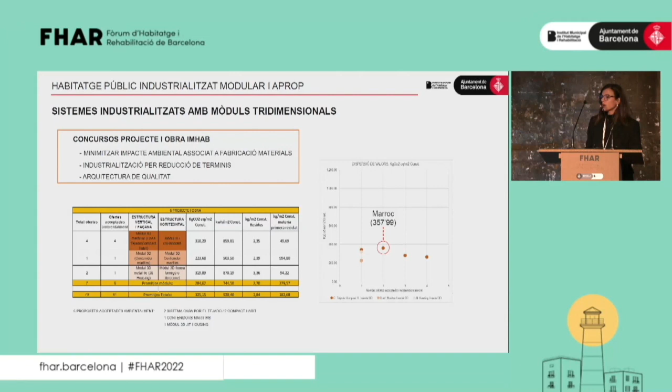We also have the dispersion diagram of three-dimensional solutions, where we have marked the position of the Marroc project that we'll be explaining with their impact value. We can see the different solutions: maritime containers in the first place, modules containing an industrial structure that was used as a structure as part of the closing.

With the different necessary adequations, and differently to others, this is an open system and a universal system, which allows us not to be linked to one only provider.

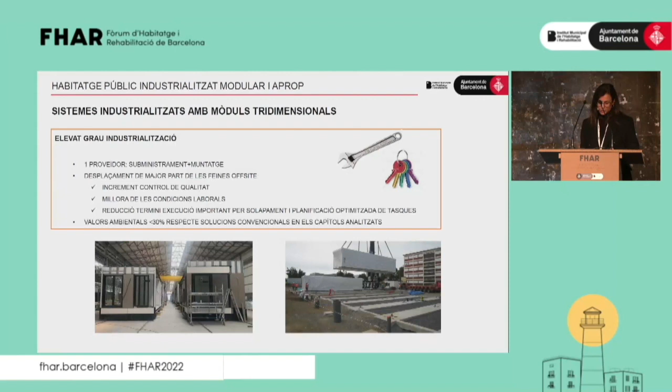However, they still mean lower values compared to conventional construction systems, traditional constructions, so to call them, at least in the chapters that have been analyzed in terms of facade and structure.

Another interesting aspect here is the integration of the agents. All of these are aspects that are cross-cutting and common to all industrialized solutions. We're not saying that some of them have them and some don't, but some solutions have them in a better way than others. We have done a 2D wooden chart and a three-dimensional solution chart.

But in reality there is no such thing as a division between the two, because, as we have seen, Isabel Perez was explaining her project with 2D wooden solutions for the construction of barracks. And there is a combination of both in different degrees of using these different systems.

Regarding collaboration, in these three-dimensional systems, the management system for project and works itself demands a close collaboration between the site workers and the building companies. But in tridimensional projects this is even more so, because the technician, the architect, will need to have the knowledge from the worker in charge of the system.

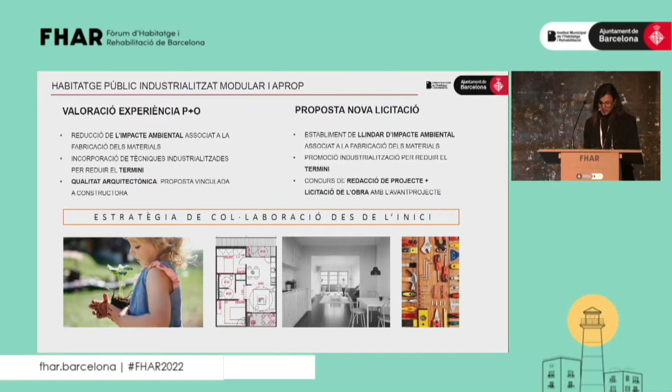And this was our presentation, and I will now give way to the projects that our writers will explain.

Marc has been working for over 30 years with 2D and 3D systems—concrete, frame, hybrid models, wood, panels. He's touched every material. He's collaborated with different companies of the sector: Pujol, Menpe, Arkinson, West. His studio is leading in applying protocols and seals such as BREEAM, Passive House, and others. He's also worked on health and architecture with WELL certifications and LEED. He has long collaborative experience in planning, planner systems, and other more complex systems with complicated acronyms that maybe he can tell us about himself.

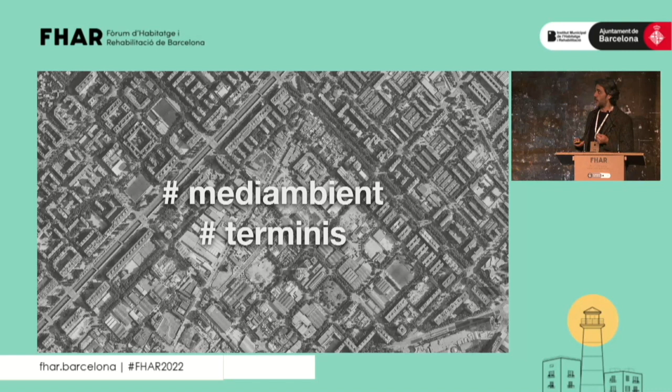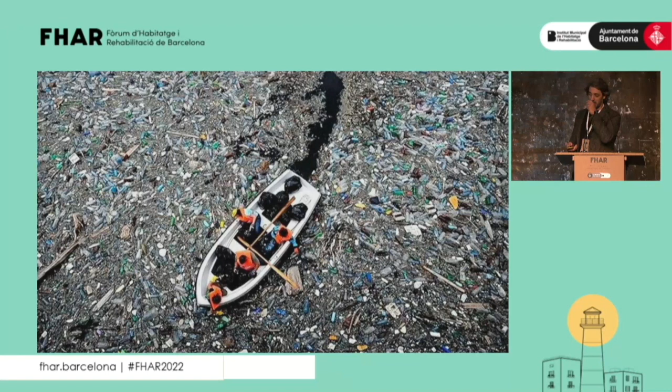This concerns environment and deadlines. These are the two main terms. Maybe for next year I would like to give a hint in the direction of environment, because I would like to show you images that are very sad, but they are real, the fruit of human activity on this planet.

We are generating these cemeteries of waste, and we are one more agent, the agent of construction, generating all this waste, all these residues. For a proposal of improvement in terms of deadlines, one of the acronyms Cecilia was mentioning is IPD.

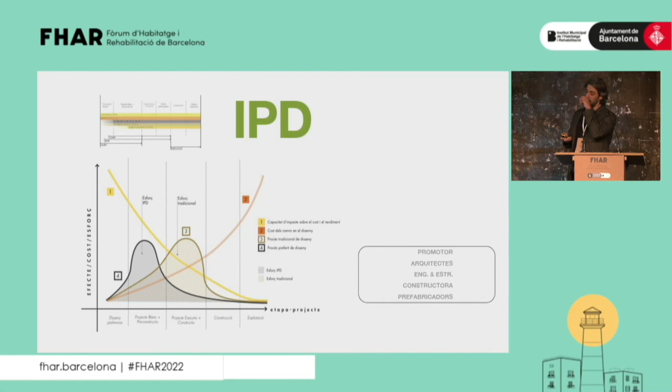This bidding is already being done, and this has been a great advance. This allows us to reduce our deadlines in a spectacular way, with collaborative work among promoters, architects, and construction specialists. Integrated Project Delivery, what IPD stands for, offers solutions to this ecosystem of people participating in the development of a project.

It's not just a construction company and some architects. There are so many departments, people, companies. All of these that we see on the screen have participated in this specific project.

We must be aware that managing over 60 people has to be done well, and this is essential. It's essential to do it in an efficient way so that projects will be more valuable and agile. In any case, these are proposals working with IPD in a collaborative way.

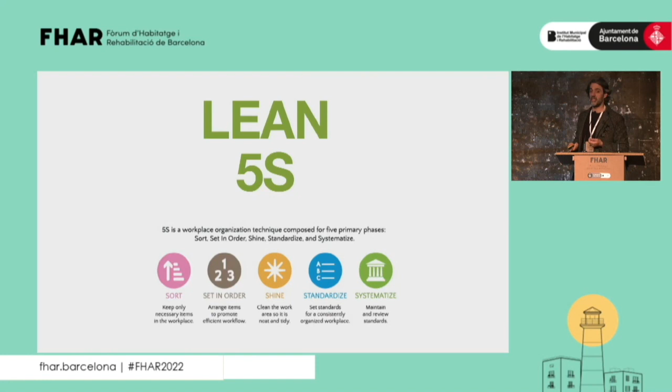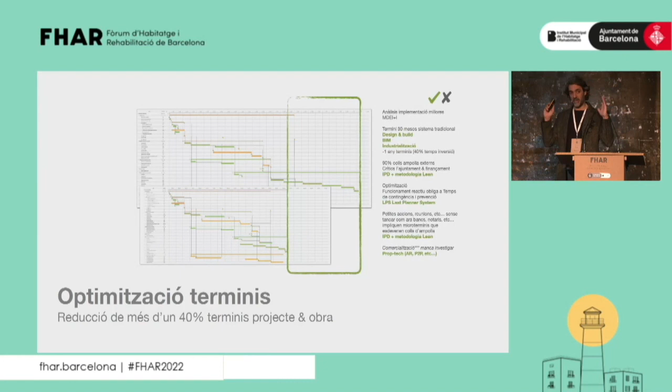Applying lean and 5S technologies, the automotive industry is one example of this. Today, we're optimizing deadlines thanks to working with these industrialized standards, achieving a reduction of over 40% in project and work deadlines.

I'm going to tell you a little bit about the project. I'm not here to talk about my book, but just a little bit. The reason why it started here, the reason why 3D, we're talking about Pere IV Street, which is near here, Rambla El Prim, in the 22@ district, where industrial activity has always been very strong.

We wanted to pay homage to this neighborhood, and we wanted to construct a building that would give us an idea of industrial activity 2.0, 3.0, 4.0, but in a newer way.

When developing the project, we realized that housing modules were being developed, thought with 2 bedrooms each. The first project was displaying a vertical communication axis and some stepping stones. But the first architectural project was leading us to very clear repetition, with different pieces.

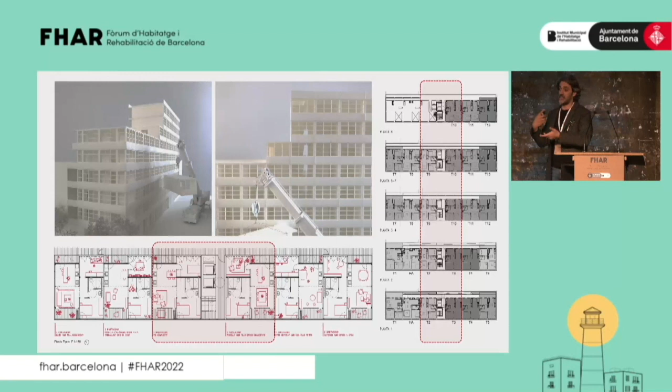The architectural proposal was asking us to bring this to the 3D experience. How will we do it? When we start with construction, the idea is to start with the central core and build upward through these 3D models and the stepping stones, which will allow phase 2 and phase 3 to be done in a more agile and dynamic way without needing auxiliary intermediates, making use of this central axis to connect to phase 2 and phase 3.

It's important to bear in mind that when working quickly like this, we enter into identical designing. But then you realize the first floor is not the same as the second floor, and we can come up to 10 different typologies, meaning prefabricated industrialized systems should also be capable of working in a tailor-made way so we can observe the different variations for each space or floor.

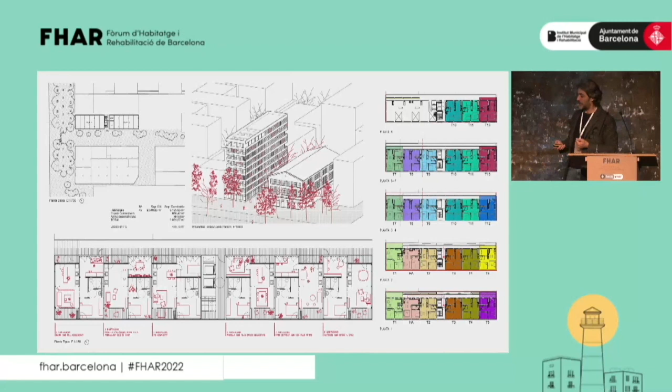Regarding the different rooms, all the floors look the same. However, the way the water nucleus has been distributed generates a triangulation, which, when juxtaposed to the gallery in the stepping stones connecting to the passage gallery, gives a broad answer in terms of how they're used, the different use typologies for families in the 21st century, ways of working from home, like home office, etc.

Prefabrication and industrialization are 2 similar concepts, but they're not the same.

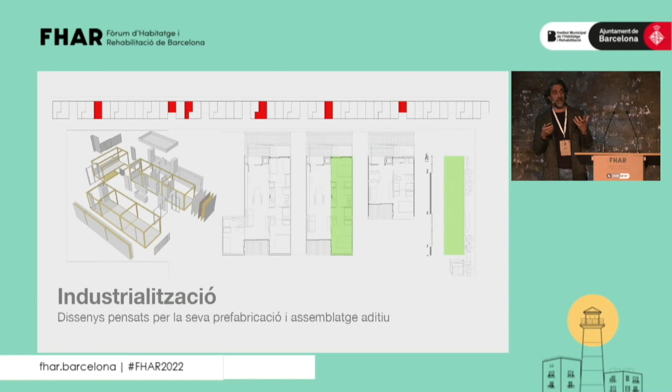When we are designing in an industrialized way, it is important to bear in mind how this will be executed, also from the design stage. We can't give an answer to typologic problems later and ask the industrialization company to give an answer to those problems. We have realized how 2D systems were not feasible and compatible with our project, for example.

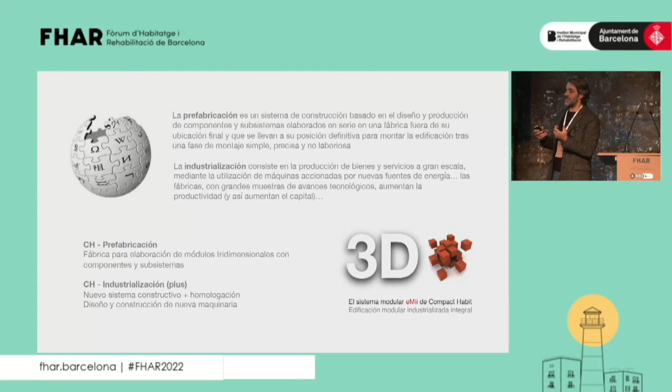It was a project thought to be carried out in a 3-dimensional way. Concerning prefabrication and industrialization, the great difference is that in prefabrication we're working outside, so the subsystems and components industry are elaborated in a controlled way, whereas in industrialization, goods and services are produced at a big scale with another technological component. Other examples being developed today work more in a prefabrication way, not so much industrialized. They are not antagonical concepts, but complementary ones.

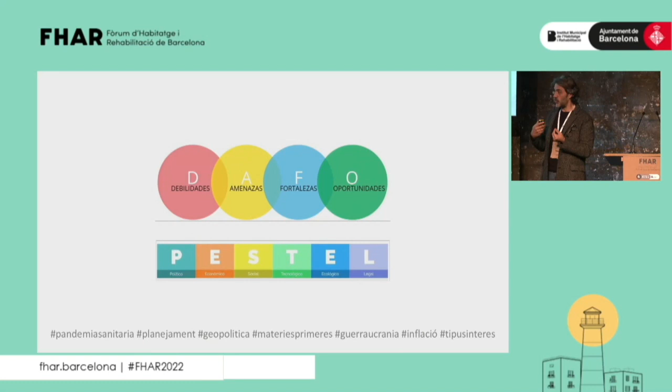Before continuing, I would like to give you a hint on our background. When I did a DAFO, I thought it was the best thing in the world, but then I realized that after the health pandemic we've lived through, and the crisis of raw materials, and a geopolitical crisis with the war in Ukraine, the production of materials became highly complex. In our case we've suffered from these variations until we reached a solution with Constructora de Aro and Compact Habit.

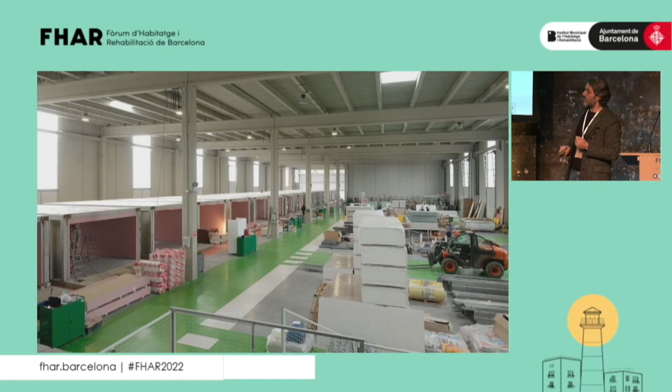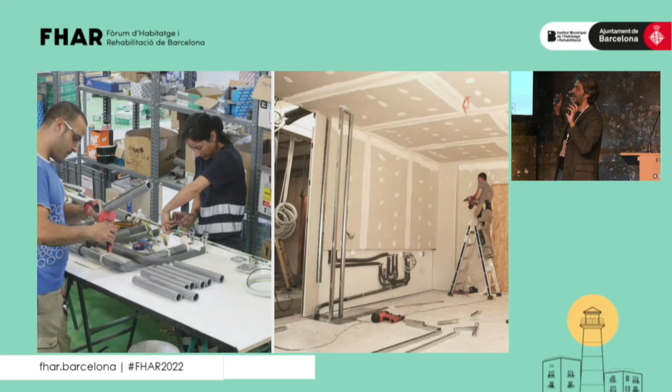This is an image of the space where 3D modules are being manufactured, and these are the 3D modules made in concrete. This is allowing us to speed up our task. We can do the underground and foundation work while at the same time producing components and systems in the workshop, which can be added onto the structure like kits, in a much more efficient way, with thorough quality control allowing us to deliver 100%, or at least 98%, finished work.

To sum up the virtues of 3D, it enables gender equality, because this has been a highly genderized, masculine sector. In Group Pujol, they are proud that 100% of their shutterers are women.

Also, in terms of quality of finishings, this system allows much higher quality, and also an acoustic improvement of the environment, so we are not affecting the environment acoustically as much.

We've asked citizens whether they would prefer long works or shorter working sites, and hundreds and thousands of transports are also being eliminated from the city, because this is done on the periphery. Modules, obviously, can be dismantled, used, and recycled. It won't be our case, but in most cases...

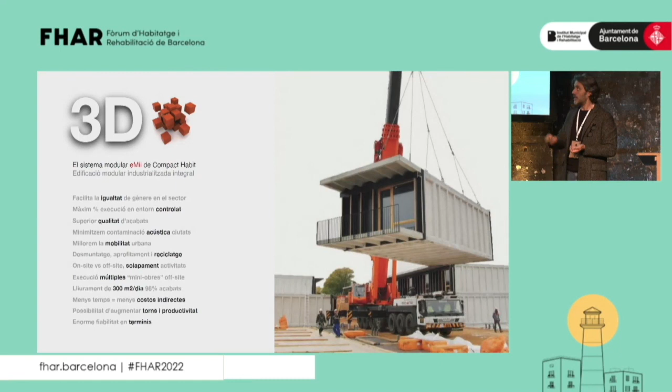And this results in great reliability regarding deadlines, as Denzel Washington said, and I admire him as an actor as well as a person: it is not easy, life is not easy. Not easy to do this in the environment of a pandemic, and it will not be easy to change a system along the way. It's not easy to give an answer to all of these things.

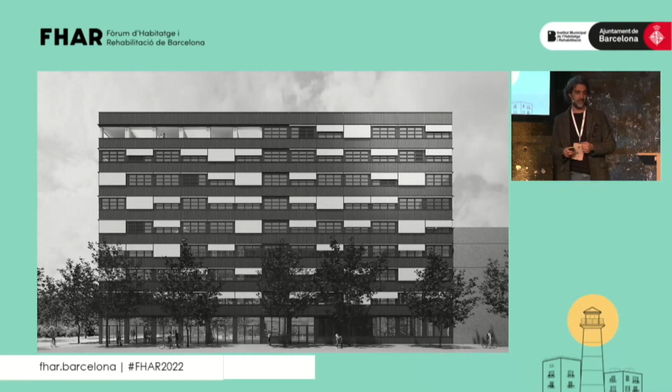But every morning I wake up with the will and with the hope that this will be a reality. But if we don't hope for it, it will never be a reality. Thank you very much.

Okay, so after hearing of this successful project, and I say it's successful because despite all of the difficulties, we're moving forward with it, and I think you're right. So now we'll go on to hearing from some different experiences of modular industrialized production.

In this case, it's another series of tenders for housing units. We thought we'd have Irene with us to introduce the APROP system. She isn't, so I will quickly go over the most distinctive features of this project, and the architects will then go on to explain each of the projects.

The City Council Department for Social Rights, to quickly and swiftly respond to the issue of a lack of housing, put out to tender the drafting of projects and the construction of housing units jointly. In this case, the system was predetermined: recycled shipping containers with high circularity and savings in delivery times. We did this because previous studies had determined that this system was ideal for these units, and we put out this tender with the teams that later developed the executive project and conducted the works.

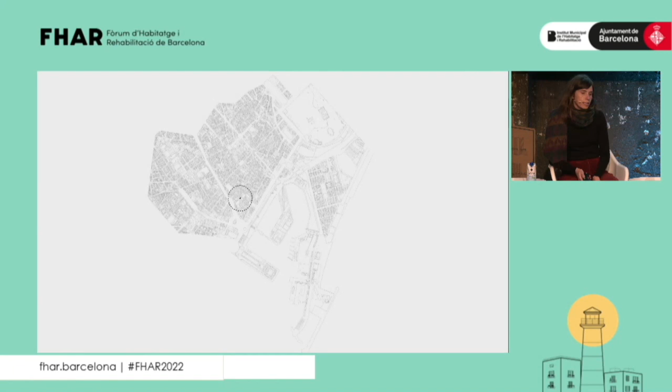If we go into the details, this project is located in the Gothic quarter of Ciutat Vella, very close to La Rambla, below the Plaza Real. It's a plot of land on a corner opposite a square, quite a small plot of land. Before, this plot of land was used as a square, and even after installing the containers, they don't take up the whole plot of land.

Conceptually speaking, there's a ground floor with a series of metal pillars and beams, and 4 layers of shipping containers are placed on top. It's also important to say that the containers are self-supporting.

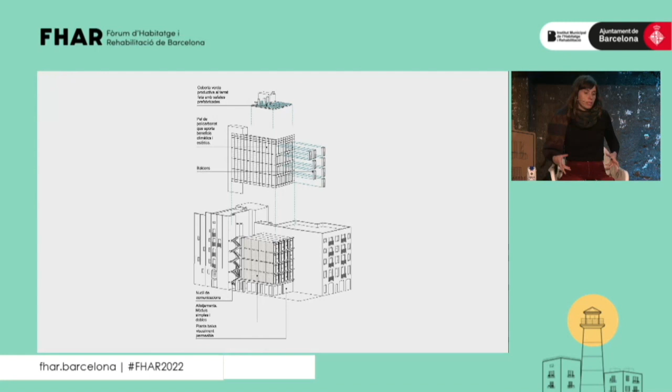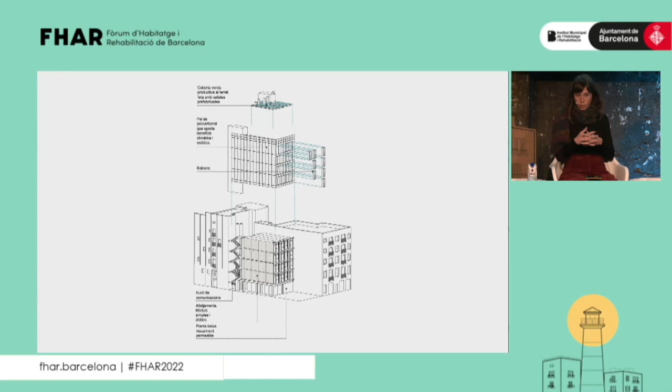They can be used for maritime shipping, so they usually face bad weather and movement, so when you use them for building, you don't have to worry too much about weather. The system used to pile them one on the other is the same one used at a dock in a harbour. There's a lock, a twist lock, the same one used everywhere when they're piled on a cargo ship. They are connected to one another, and when they are all assembled, then we build the stairwells, the facades, and the rooftop.

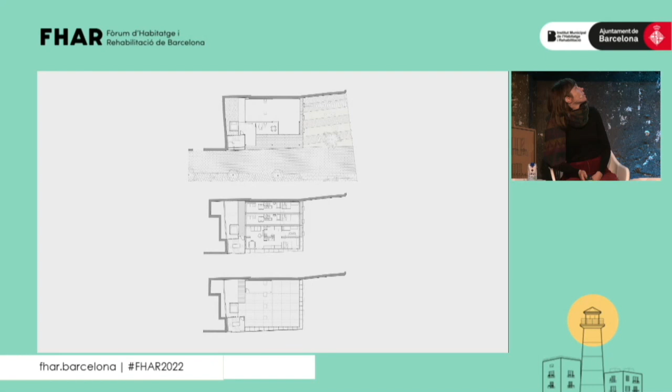Here you can see a cross-section of the ground floor, the housing unit, and the rooftop.

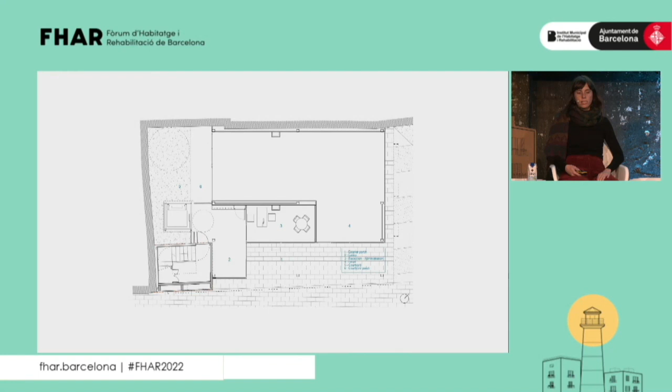The ground floor is a space linked to a primary healthcare center in the neighborhood. It's a structure of pillars and beams that support the containers, an open plan which leads to a space in the corner that can be used as an extension to the square, and then there is a covered patio for the neighbors to move into the stairwell and go up to the housing units.

In the floor plan of the housing unit, you see the containers are placed longitudinally. There are 4 floors in this building, and there are 2 that make up a simple housing unit, and two that are placed vertically, which can form a double unit with two houses.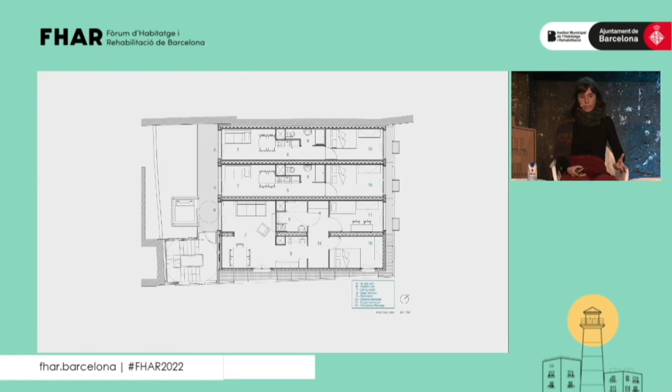There are complications because containers are just over 2 meters wide and 11 meters 70 long. So obviously it comes with obvious limitations as for the housing unit size, but when you join them you can build housing units with a surface area of a small house. The smaller ones are around 30 square meters, the ones with 2 bedrooms are around 60 square meters. The rooms are more generous, with a kitchen with 2 kitchen tops, an accessible bathroom for wheelchairs, and 2 bedrooms. In future projects you could unite up to 3 or 4 containers. So it's a system that, in spite of the limitation, can offer many different possibilities.

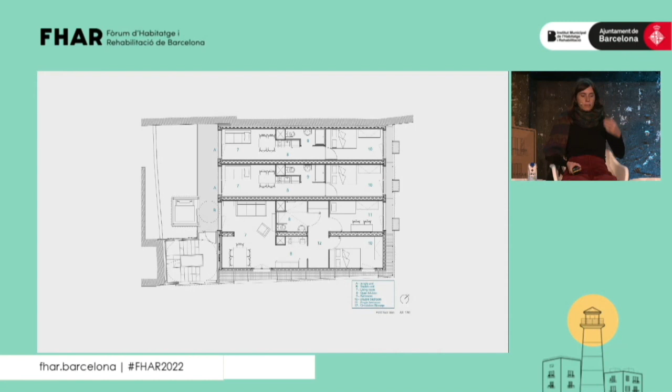And the points where containers are joined need to be reinforced. They're self-standing, but where the containers are united, you need a frame at the junction point. We thought this system was very valid to build 4 up to 7 stories of containers at low cost, without having to reinforce the actual containers. You could pile more layers of containers, but then you would need some form of reinforcement.

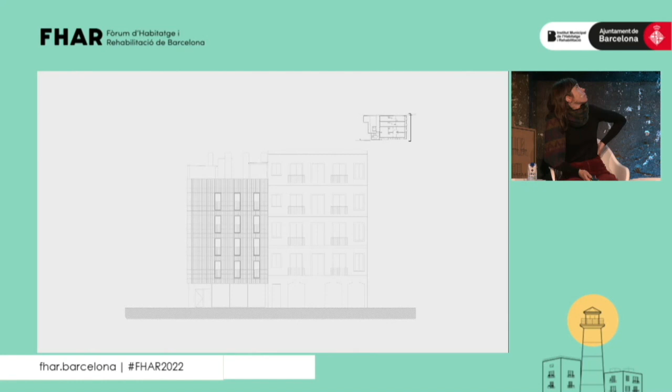So here we look at the facades. This is just to explain that in Ciutat Vella, the limitation with the size and shape of the containers means that buildings are quite narrow.

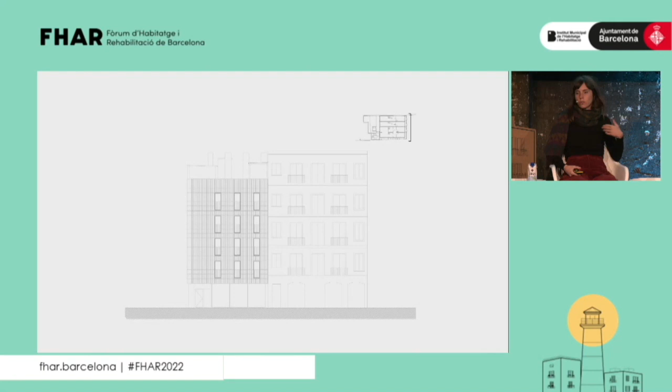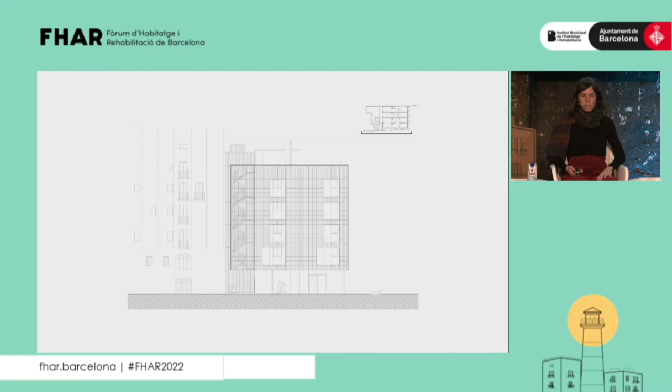The neighborhood, the town planning, and the size meant we needed 2 layers of cladding on the containers so that it aligned to the facades of neighboring buildings, and to give it a slightly prettier facade, which on the one hand makes the project unique and distinct. The other reason for this double layer of cladding is to integrate it with balconies that may remind us of the traditional vertical balconies in Ciutat Vella, with shutters and metal railing. The side facade is open, it gives onto the square and faces south, so we wanted to leave open spaces to make the most of the sunlight since it's facing south.

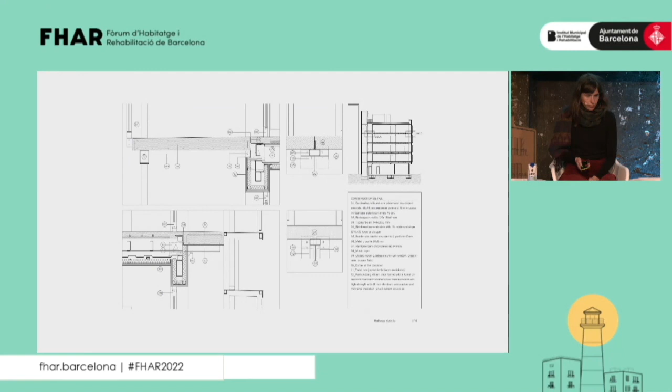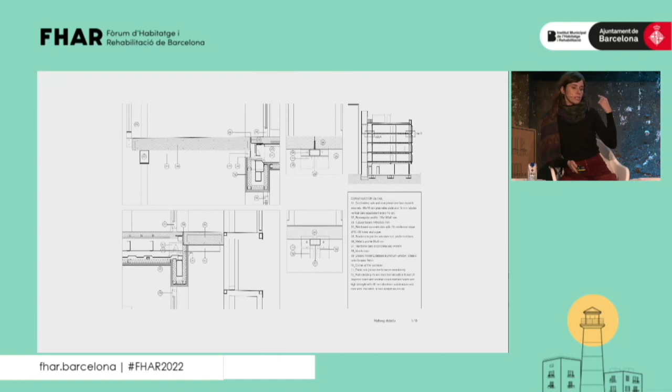All of the elements on the facade and the rooftop are dry construction. The whole building was put in place in 4 months, with 4 months of work ahead of it in the workshop, and it's all dry so that we can relocate it if necessary.

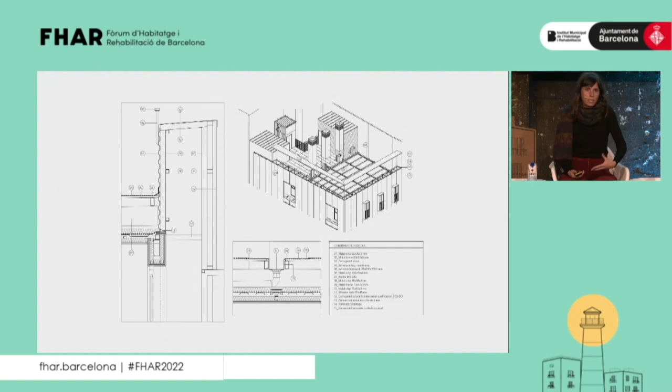So we're trying to shift the mindset of architects, construction companies, and all stakeholders so that we stop thinking the end of the day is when the building is inaugurated, but instead think of its lifespan and the possibility of dismantling a whole building from its current location so it can be carried to another location, dismantled, and its materials reused. So it's not just about constructing the building, but looking at a second life cycle it may have later on.

And now I wanted to show you some pictures so that you saw the construction process. The first part was done in the workshop.

You can do it in an empty plot of land. Obviously, if the construction company has a workshop, you can control the weather conditions better and have better control of the delivery times. But in this case, it was done on an empty plot of land, and we did work on the containers.

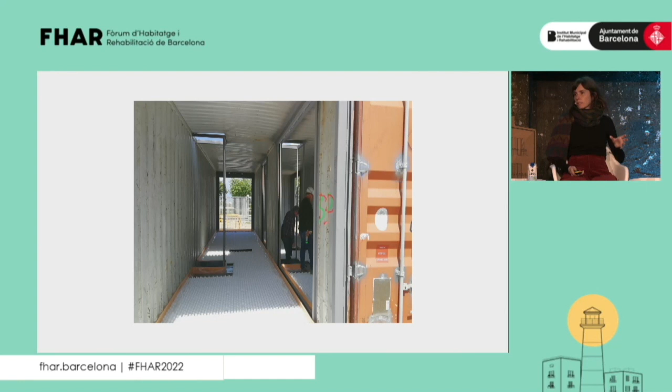So we had the 4 levels aligned on the land, and when we were carrying out the executive project and looking at how to overlap the different stages to shorten delivery times, meanwhile the construction company on site was working on the interior of the containers. Here they're installing underfloor heating, then there are vertical patios, and the cables and drains are all put inside, and as I said before, they're all located at the same point of the container.

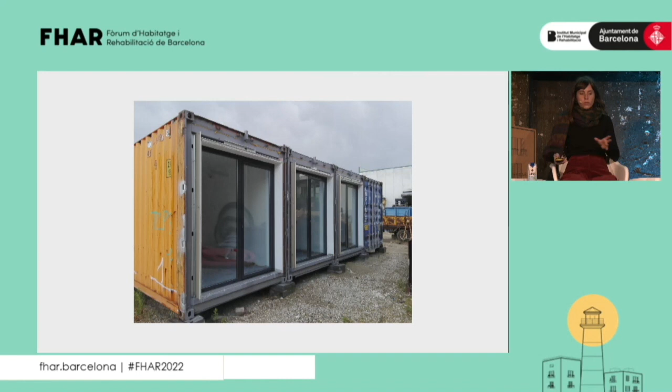So here you see what one floor of the building would look like with these 4 containers side by side. And at the same time, while this work is ongoing in the workshop, on site we did the first initial steps on the land to move earth and lay the foundations. It's in Ciutat Vella, which has a lot of remains.

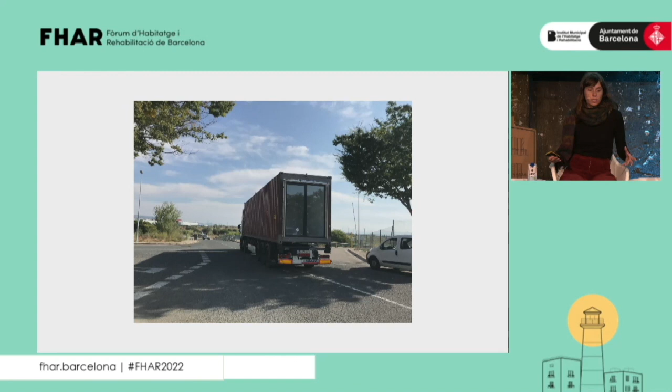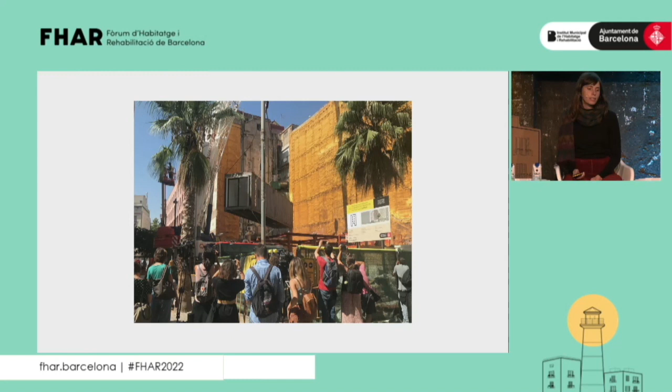Then we started erecting the metallic structure for the ground floor, and here the transport. It's also important to say that you'd use the same type of lorry that you use to move a traditional shipping container. The container can go on the same lorry, meaning you can optimize and use a resource that already exists. This was the initial moment, with all this expectation when the containers arrived on site.

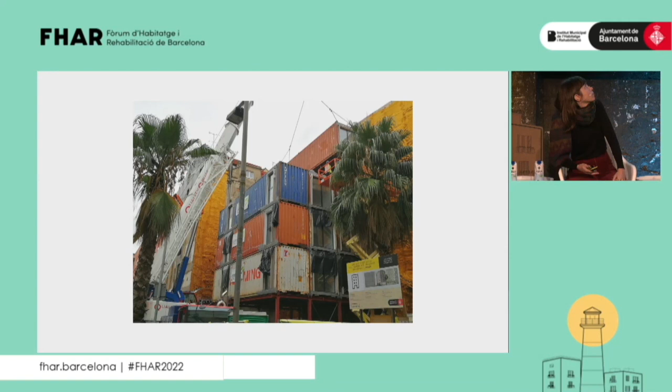So the first floor, and then how they were stacked one on top of the other. This image generated a big discussion, because you can see these old shipping containers stacked one on top of the other, but obviously this doesn't show the picture of the end result. This is the lock used to stack the containers. So these are self-standing containers stacked one on top of the other.

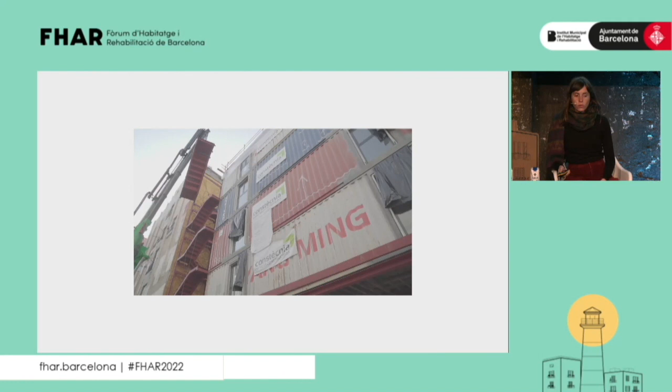Here we're installing the staircases. It's all produced up front in a workshop and then installed, then the rooftop, which is dry, and here we have the insulation, the outer insulation, and then the aluminum skin that was put on the facade.

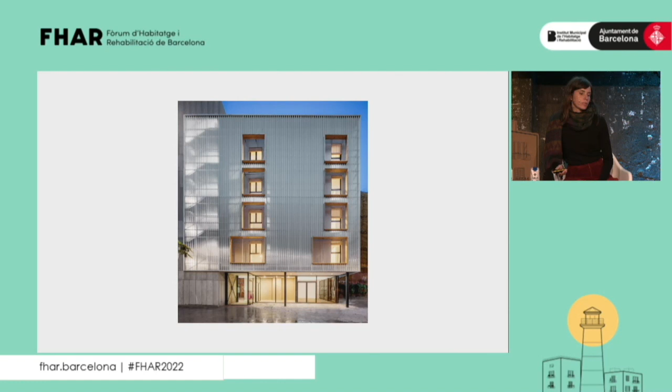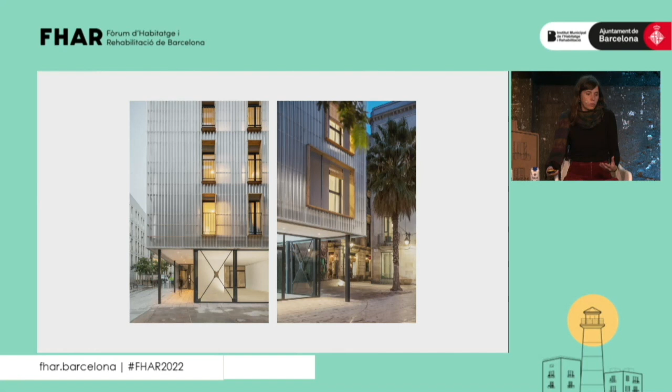And here we can see pictures of the finalized project, which obviously is quite different from those initial images when you just saw the raw containers. Once it's completed, you see the facade with aluminium layers which melt in well with the old town of Barcelona.

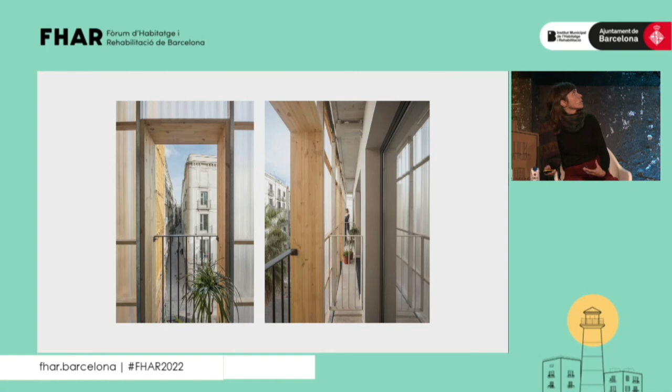Here we have a picture of the access area to the containers, the staircase, and this outer layer, where the balconies are. And we have 2 images from the inside, the single unit and the double unit. Obviously, in the double unit, it's wider.

And here we see the list of collaborators, as Marc and Cecilia were saying. This is an extremely collaborative project. It's all done at the same time. Conveying the information isn't top-down, going from the architects to the construction company to the workers on site. It's horizontal, since it was a pioneering project.

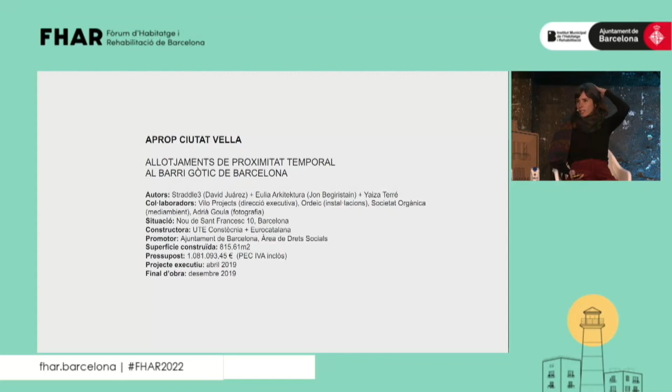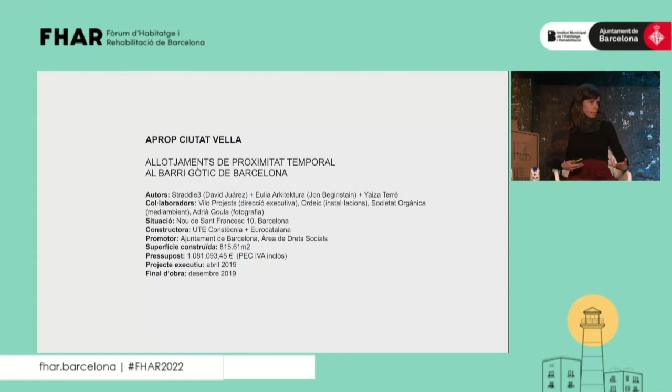It was the first time we built with maritime containers, so we had to carry out research while the project was being drafted with all the stakeholders involved, including firefighters who'd never seen this type of construction. We had to look at how they're going to be carried, the Energy Agency of Catalonia, social services. We held quite intense weekly meetings to look at how we could turn these containers into a building, because we hadn't had previous examples.

And that would take me to the end of my presentation. Thank you. Thank you so much.

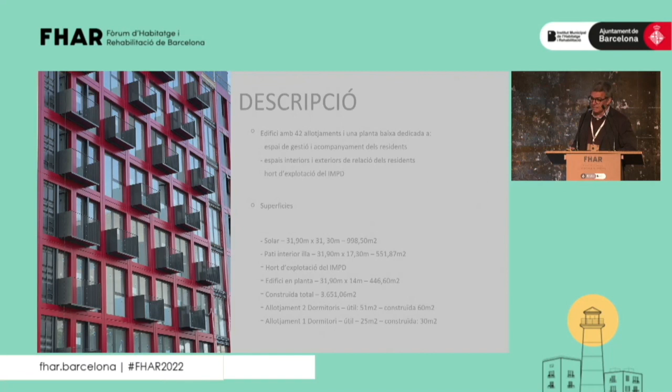On the rooftop, we have all of the centralized services, and all of the rooftop surface has solar panels on it. As I said, each floor has 11 containers.

There are 2 types of housing units, one made with 1 container and others made up of 2 containers, which, as Yaiza said, requires opening the sides of the containers to connect one to another. Here we see the 6 housing units per floor, some with 1 bedroom, others with 2 bedrooms.

The constructive system we used was recycled shipping containers. This industrialized system allows us to improve efficiency because, first of all, we're using universal elements which anyone can manipulate. You don't need large infrastructures, and it can be done in an easy way. Secondly, they're easy to carry and assemble.

We have the 40-foot High Cube model. We saw Yaiza's slide where you have the lorries made to carry these containers. Thirdly, it shortens the delivery times for all of the points we mentioned before, and also because the modules are self-standing and don't need reinforcement structures.

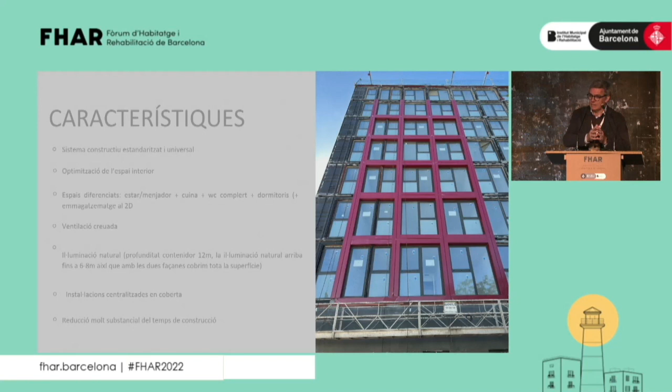There is also an optimization of space. Each square meter has a functional use, and at the same time we use easy, low maintenance and highly resistant materials. Thinking also of what Yaiza said, the life cycle of this container isn't limited to one single building. Since we had guidelines to make these containers compatible with other similar projects, they are totally compatible with setting them up in a different location.

Concerning sustainability, this is also something that is taken for granted in this kind of project. It is a sustainable construction because it involves a reduction of the environmental impact, through mechanizing and optimizing the reduction of waste using recyclable and recycled material.

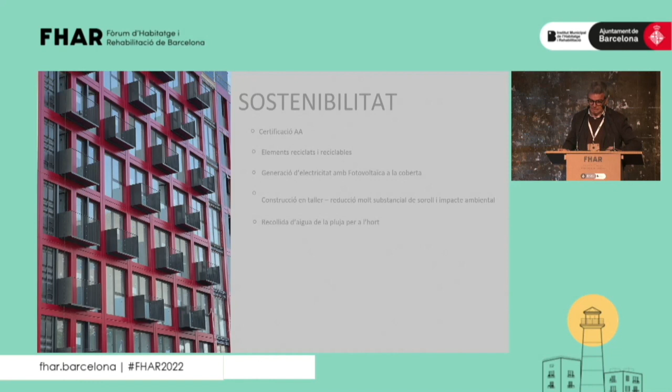In terms of temperature regulation, we have photovoltaic and hydrothermal systems. We're using rainwater and storing it underground, and clothes washing is centralized in order to minimize costs and space in these locations. All these actions make the energetic classification of the building rated as double A.

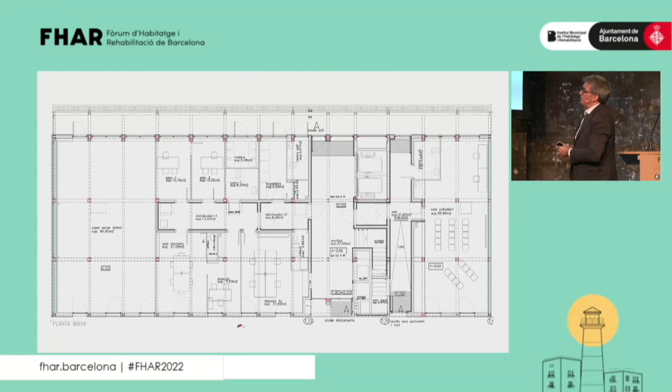The ground floor, as I was saying before, has a central space for management where the offices for the management of the equipment are. Then there's a multifunctional space, a multifunction room, and there are 2 elevators because there are more than 24 housing units, and there's a space that is undefined here. There's a prototype floor, which is the same for every floor, and the only thing that changes is the position of the balconies.

In the beginning, we studied the option for every container having its own balcony, but in the end we opted for a zigzag distribution, where we were able to keep to the budget, and therefore the balconies were reduced by 50%.

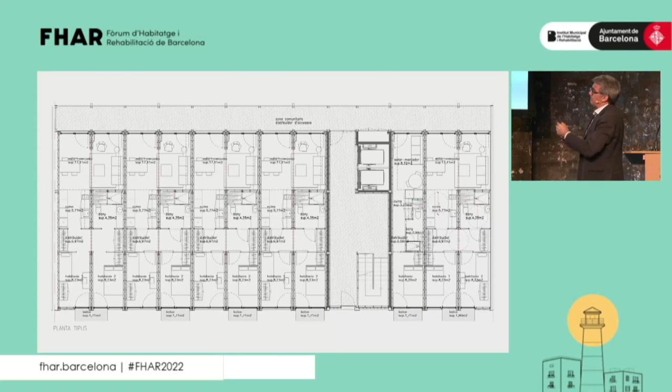There's a container next to the elevators, and the rest are two-container lodgings. There's a functional program of one or two housings, and it changes in the sense that the living room and dining room are bigger in the two-container one, and the kitchen and bathroom are bigger as well, and they have a second bedroom. That's the difference from the one-container housings.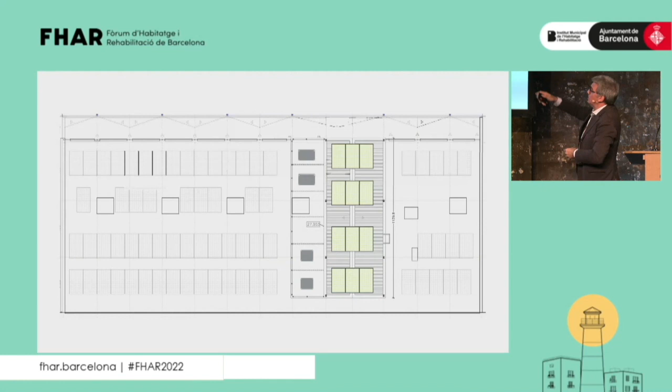The roof is full of photovoltaic panels, and this is the facade looking out on the main street. All these solar panels are filling the roof. The roof is totally filled with solar panels.

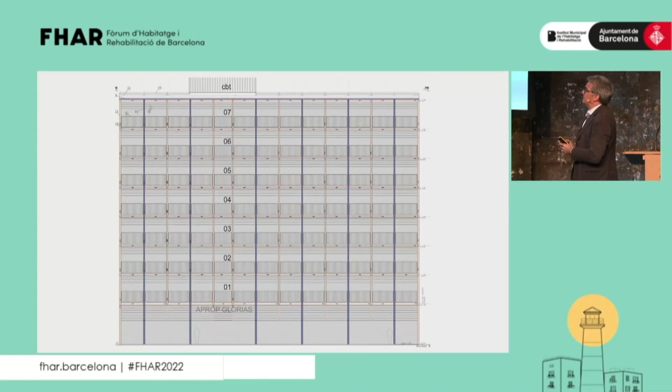The facade is covered and cladded in sheet metal, but we wanted to show that this has been done with shipping containers. The original container doors have been kept and maintained. This would be the inner facade looking onto the inner patio, reflecting the modules, which are powerfully conveyed by the containers, but they look more like a southern patio, giving it a different aspect, a different look. Differently from what my colleagues were explaining before, our project was working on the container, and there was some retouching necessary because of watertightness issues, thermal protection, etc.

Which meant that some elements on the facade had to be placed at the last minute. In my understanding, the evolution of such projects should have to do with the fact that all of these elements should be able to be implemented from the start.

In our case, the joining of the containers, which structurally used standard pieces for such end, twist lock and bridge lock, horizontally and vertically joining and fixing these containers one with the other, such as they are fixed when shipped in by sea.

So vertical sheet metals and horizontal sheet metals were manufactured, which allowed the insulation to be put into place, and they were indicating the place where each square was a container, so they were indicating where each container started and ended.

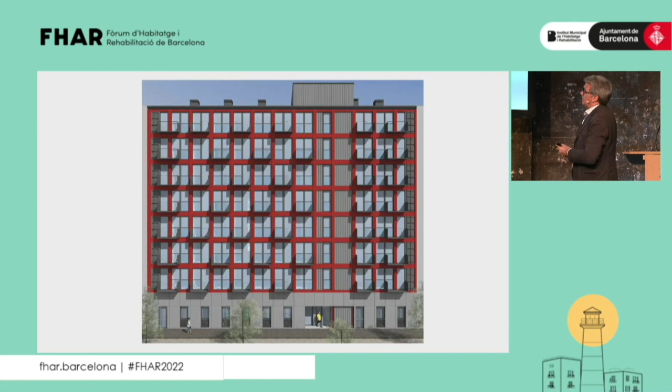In terms of the containers, they were totally prefabricated. They had been manufactured in the workshop, and the only thing that had to be done was to regulate them. That was the last action carried out at the level of the facade, the sheet metal and the balconies. And this would be the image of the end result of the facade with all the side doors and the alternance of the balconies, the inner patio, and the inner courtyard.

And something interesting in this project as well, which was more regular and which allowed us to work with these container pillars in a much better way, was this passage which allowed us to distribute the facilities. We had a vertical nucleus or center, this hole next to the elevators, and this is where this passage would distribute the different equipment, always thinking about the potential dismantling.

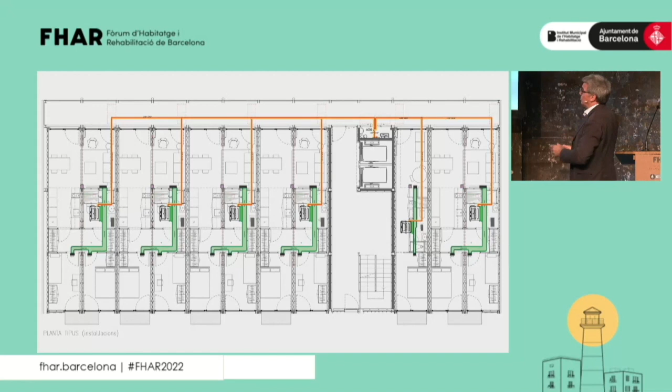It's important to bear in mind that this passage was necessary for the equipment. These reinforcements were necessary in the simple module. They were simpler because the openings were smaller, but these reinforcements should be executed when doors or the container background are dismantled, so there have to be some reinforcements. In this case, we did them in tubular formats.

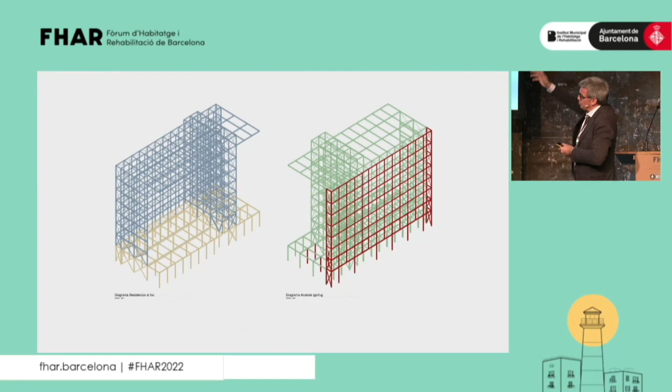What is more complex are the side openings, which had to be done in order to connect the two containers. So a two-container housing unit had to involve these two openings. This structural diagram had to be done thinking about the wind. The passages had an additional structure beyond the one you see on the screen.

And here's a video to show you the goodness of this procedure, which allowed this to be done in a workshop, in a controlled environment, working in different shifts.

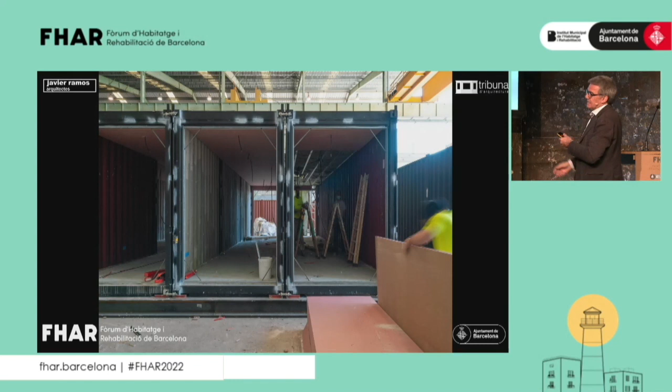The construction company is working in Calaf. In the wintertime, it's cold; in the summertime, it's hot. But there is an environment that allows you to work here without being affected by the big differences in temperature.

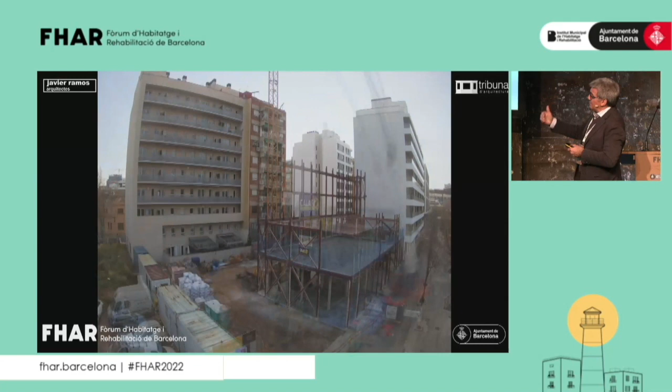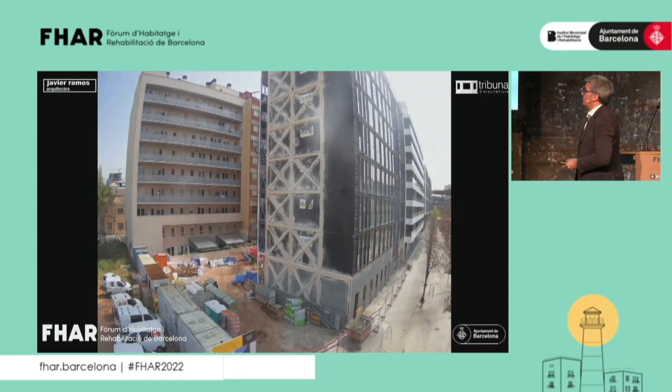Here's the concrete, the reinforced concrete on which the containers are to be placed, and then the passages were on ladders, and the communication center that is used by the workers in order to work at the construction site. And this has to do with what Marc was saying before.

Here are some images of this working phase in terms of the structure of this interior passage, with a first floor of containers that has already been assembled. This is one of the floors, I can't remember which, but these are the roofs of the containers themselves. On top of them, the next layer of containers are placed. When you step on those containers, they wobble a little. They're not really meant for bearing a lot of weight or for walking on them.

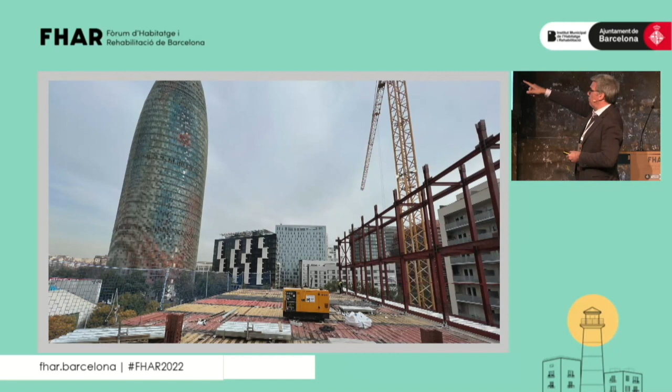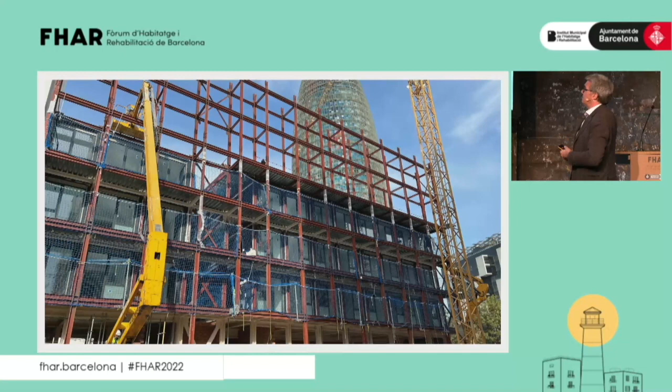Here's the interior, the inner courtyard. It makes it a bit harder to understand that this has been made up by containers. But here we see to what degree details are being defined and how it contrasts with the neighboring buildings and the different phases of how the building was growing.

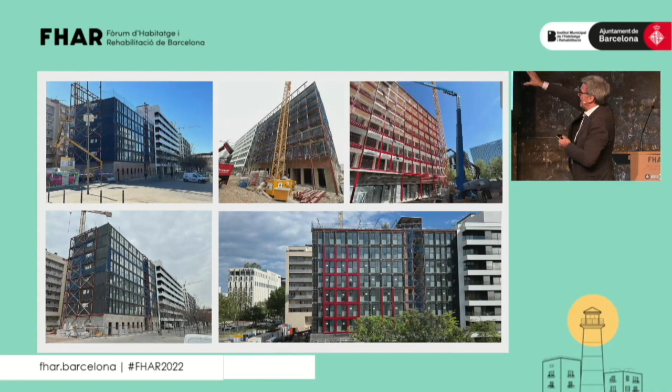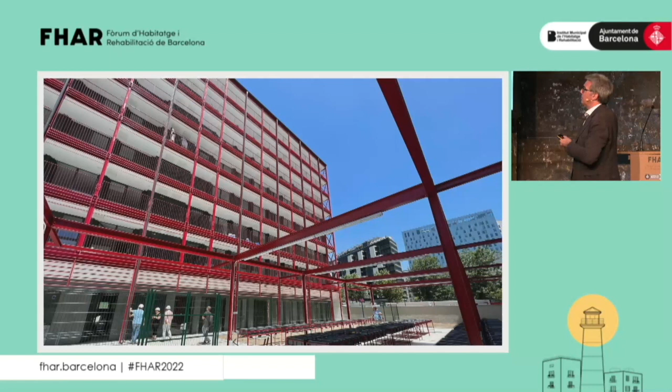And upward—here's the moment where the metal sheets started to be placed, and here's the rooftop with the solar panels, and finally the inner final space, a vegetable garden. So this is all. Thank you very much.